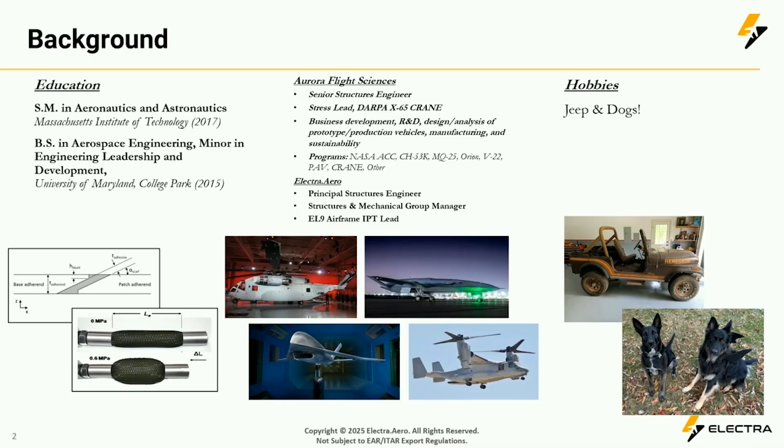Certified for single pilot operations, but with 2 crew stations, carrying roughly 2,700 pounds of payload, a max range of roughly 1,100 nautical miles, a nominal takeoff and landing roll of 150 feet, a max cruise speed of 175 knots, and being a hybrid electric aircraft operating in a mostly quiet environment, less than 75 decibels during takeoff.

So I really flew through the major headline there of why the EL-9 matters. What are we trying to do? This is an ultra short takeoff and landing aircraft. And what I mean by that is we are using blown lift to provide helicopter-like operational profiles. We've demonstrated that blown lift can increase our wing lift by 7-fold, allow takeoff speeds less than 35 knots, which allows us to have a ground roll less than 150 feet, or a total footprint of 300 feet.

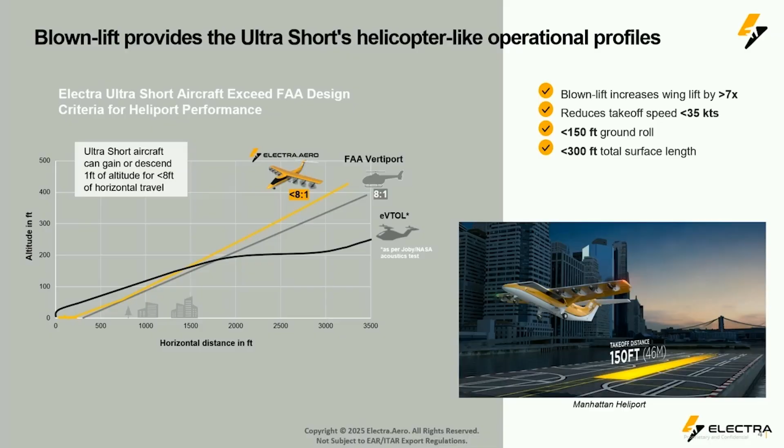So imagine a 9-passenger aircraft that can take off and land in an area the size of a soccer field today. Or what's shown there in that bottom right-hand picture, one of our desired missions that we're targeting is operating in and out of the Manhattan heliport.

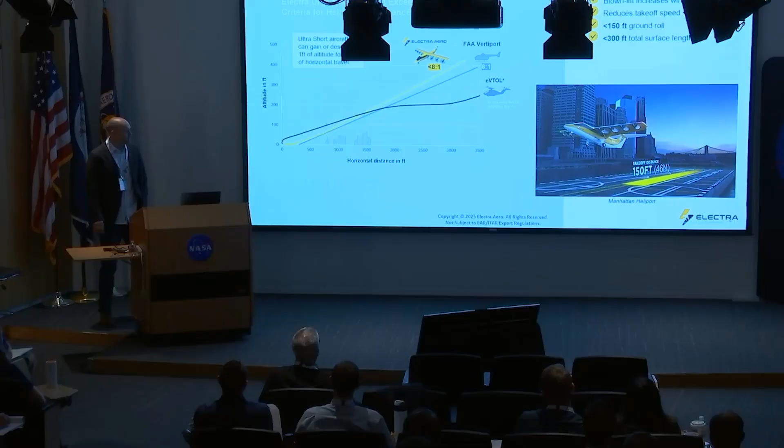So how do we do it? So blown lift isn't new. It's been around for decades. Aircraft currently flying today have this capability, and even some of the engineers in this room have probably researched it. I know at NASA Langley they have researched the opportunities and benefits of blown lift.

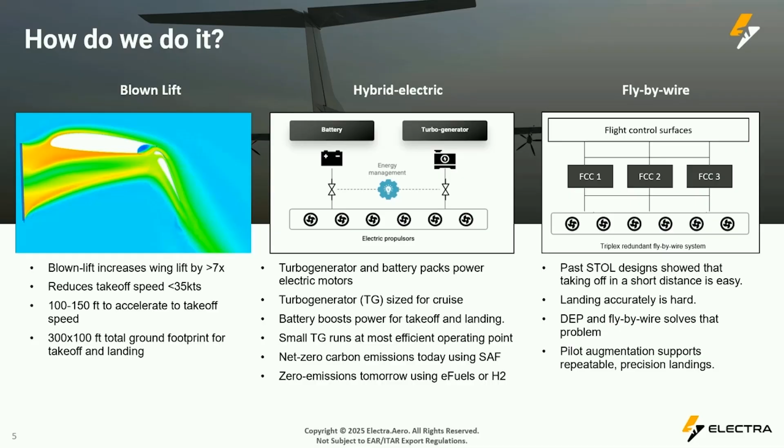What we're doing at Electra is really integrating three core technologies that provide unparalleled performance. The blown lift technology that I've already touched on provides that 7x wing lift at very, very low takeoff speeds, less than 35 knots, and enables us to take off in less than 150 feet and operate in a 300 by 100 foot ground footprint.

And how do we do that? This is a hybrid electric aircraft. There's a turbo generator and battery packs that provide power to the electric motors. This hybrid architecture allows the turbo generator to be sized for cruise, and the batteries are really there to provide that power boost for that short takeoff and landing.

Now, past STOL designs have really showed that takeoff in a short distance is relatively easy. Where it gets complicated, especially on the pilot, is landing accurately, over and over again, safely, repeatably. And in these tight environments that we're targeting, like that Manhattan heliport, you can see where it would be very critical to not miss your mark. And so that's where the EL9 is also going to incorporate a fly-by-wire system to really augment that pilot capability and enable all of this to work together and certify as a Part 23 aircraft and demonstrate this capability.

Now, at Electra, we face a lot of the same problems that every new aircraft development faces. We don't have enough people. We have to move really quickly, and systems is constantly putting holes through our primary structure. So like I've already mentioned, we are a startup. We have a really small team of extremely talented engineers. We're roughly 80 employees total across Electra.

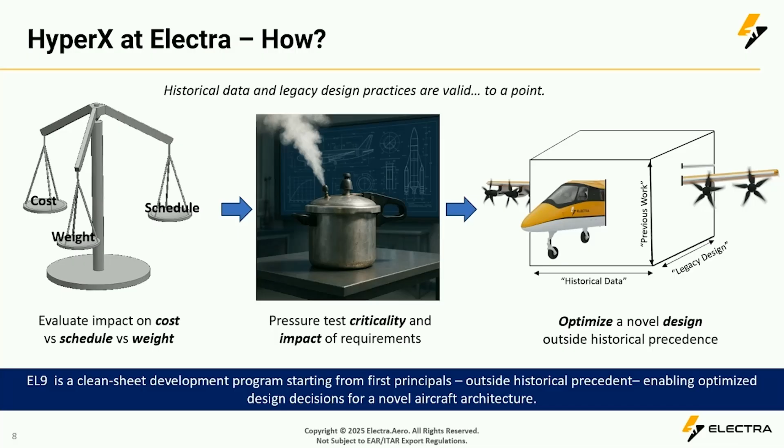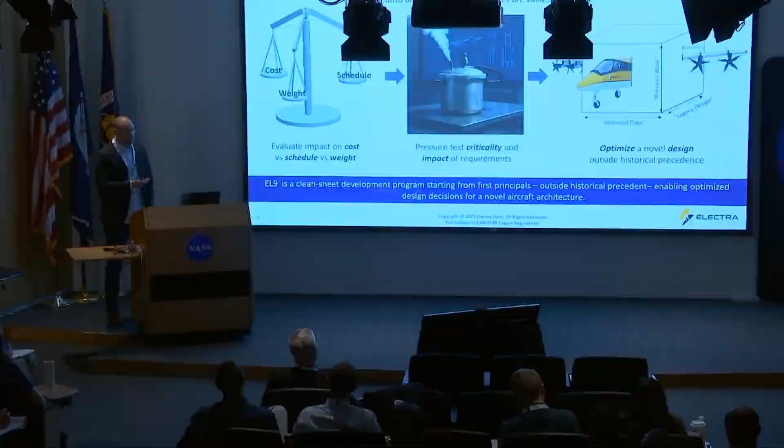So how do we do that? Well, we started by evaluating a lot of our design assumptions, requirements, and what we felt were the best practices against cost, weight, and schedule. And this allowed us to really pressure test the criticality and impact of those different assumptions. What was actually driving weight? What requirements could we change or give up to allow us to meet our weight targets, or what was actually important to the program? And this really drove us to optimize our design beyond just early parametrics and really started to redefine the box for the EL9 airframe.

So going on in a little more detail, how do we do all of those steps previously? We've run a lot of trade studies on this aircraft, and I say we, Electra's partnered with Collier and JD and his team to do a lot of this analysis and feed the Electra team as we're progressing along. So we're using HyperX to evaluate the structural layout, assess the design and analysis requirements to rapidly mature beyond that parametric and really feed the design guides and the analysis plans.

So, we don't have the super long detailed design guide from a past program where you would just copy and paste and start tweaking that to your program's needs. A lot of these documents we're starting from scratch, from day one, with first principles, and then going through and running these trade studies to say, okay, we can do better. This is what the team needs to do, and how we're going to standardize the design to meet our cost, schedule, or really manufacturability requirements.

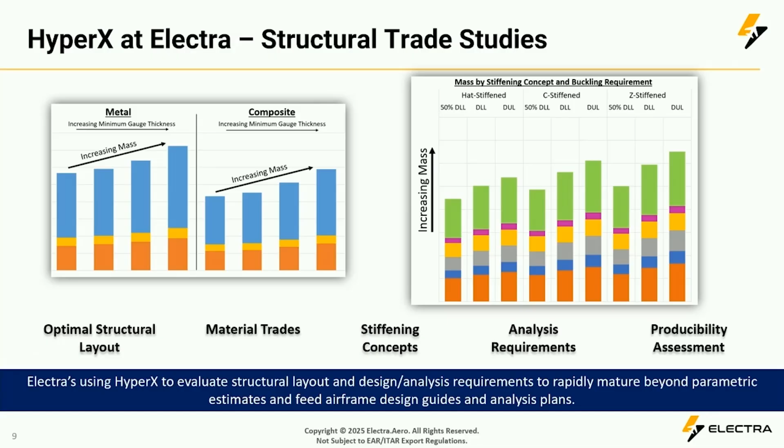So we looked at a lot of different trades. You can see a number of them here, whether it's material trades, all around the aircraft evaluating metal versus composite for different parts, various stiffening concepts, trading for weight, the hat versus C versus Z stiffened composites, as well as analysis requirements. So you can see, we also looked at how changing minimum gauge for metallic as well as composite and the impact on damage and durability tolerance impact the aircraft cost and weight, as well as the buckling you can see on the right.

And we looked at a large range of buckling criteria to see what was driving weight around the aircraft and what assumptions we could tweak between the wing and fuselage and empennage and what were the right levels of conservatism to feed into the design at this stage so that we could be confident that we were designing an airframe that would in the end meet our objective.

And lastly, producibility assessment. So throughout all of this, and I'll touch a little bit more on the next slide, we were constantly talking to manufacturing engineering to say, hey, can we make this? Can we do better? Sorry, August and Craig, I don't have any good pictures in this presentation of how the team took advantage of HyperXpert as well as the CAD generation tools, where we're feeding out that data and passing that along to the rest of the program team to say, can we manufacture this part? Can we manufacture it at the rate that we're looking for and at the cost that we're looking for? Once we get that thumbs up, that now feeds back into the design guide, into our best practices going forward as a company and as a team as we're maturing the EL9.

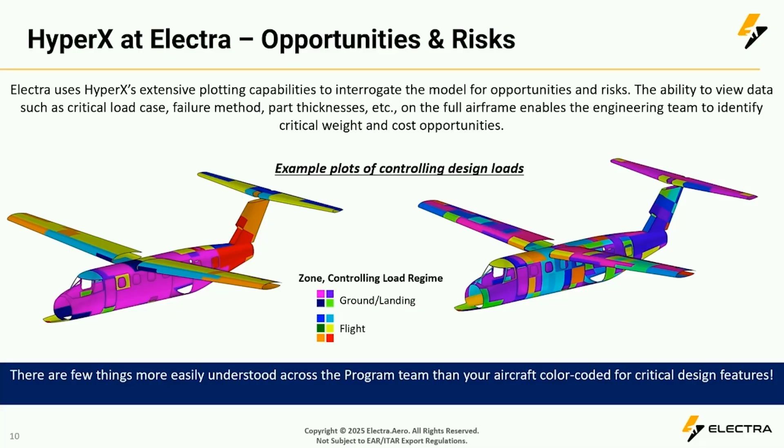Something that's unique, at least for me, working on a brand new aircraft like this, where the customer is less defined, is we are defining the requirements and what is best suited to meet the mission that we're targeting for this aircraft. Now, of course, being a Part 23 aircraft, there are ASTM requirements of what loads we need to consider, but there are also requirements that we set that we want this aircraft to do. And so these kinds of plots are critical for us to sit down and say, what are the driving load cases? What's increasing weight around the aircraft? Is that an appropriate load case? Is it certification driven, or is this Electra imposing a very strict requirement that we're trying to meet, where maybe we can loosen up that grip a little bit?

And so these kind of plots have been really helpful as a team to shape the mission and objective of the EL9 aircraft. And again, then we can go back to the loads group, or flight controls, and say, hey, we need to make a change because this is driving weight, and I think we were being over conservative. Can we tune the flight control laws, or can we tune the takeoff and landing performance so that we can pull weight out of the airframe?

And so Electra is heavily using all of the plotting capabilities to really interrogate these models and reduce the overall weight of the airframe. And not just weight, I mentioned there cost as well. So like any certified aircraft, we are heavily focused on weight and cost and schedule of hitting that 2029 entry into service date.

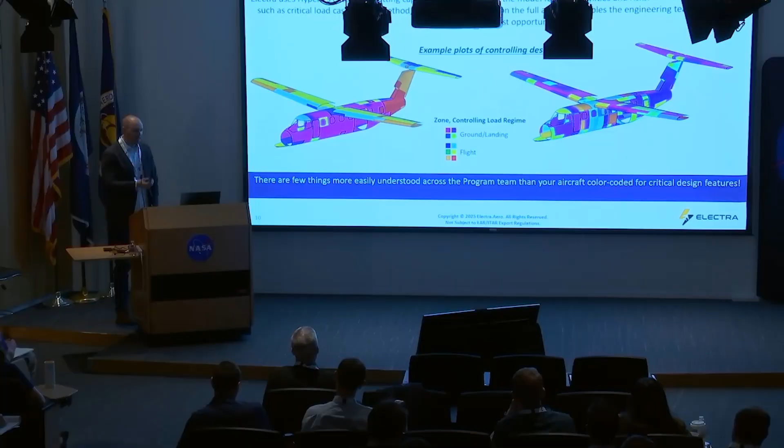So, I touched on it very quickly, but getting the manufacturing engineers in here as well and plotting not just loads, but from the HyperX plotting, looking at the stiffener spacing or stiffener heights or cross-section shape and all of that. And all of that feeds into our metrics that we're using to evaluate weight and cost and in the end justify how we're going to move forward maturing the design of this airframe.

So I do want to cover some of the high-level challenges and maybe some recommended solutions for interfacing with HyperX. I know everyone here is pretty much a user, and none of this should be a surprise. But as with any tool, users must recognize the challenges and master those design principles to avoid that classic garbage in, garbage out. When you're a really small team working on this, it's really easy to fall into this trough.

New programs, we typically allocate time in the schedule to set up those analysis tools so they fit the aircraft. Every aircraft presents unique challenges that the airframe stress and design engineer has to overcome, whether it's in our case, systems integration throughout the airframe, leading to very large penetrations, or high temperature requirements. Every aircraft's unique. And so usually in larger companies, you might start with an Excel template or Excel tool, copy and paste it for your program and start editing those tools.

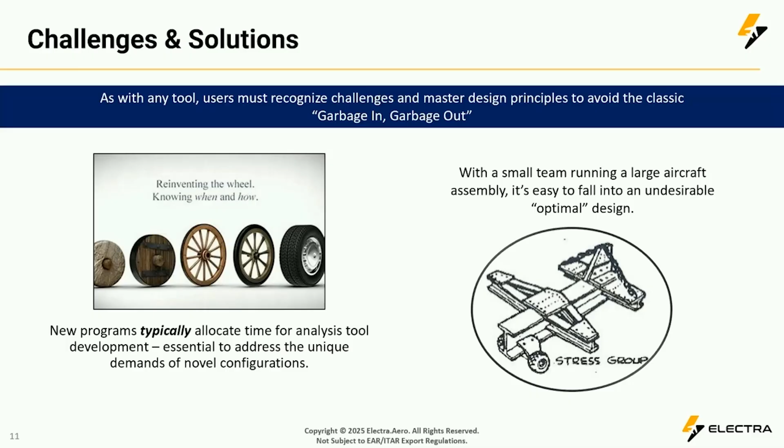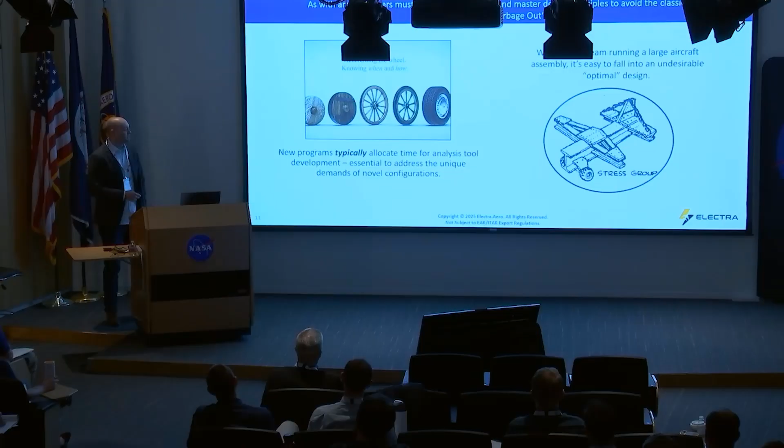Very quickly, once you really start digging into the weeds, you realize your design was what's shown here in the picture. It might show all positive margins of safety, but you go and show this to a designer or a manufacturer, and they might kick you out of the room. So it's really easy to fall into these kind of holes, and you have to be aware of that with any kind of tool, but particularly I think HyperX brings its own challenges.

So how do you avoid these two pitfalls that I touched on in the previous slide? Like a lot of the folks here have touched on today, you plan around incorporating and optimizing for HyperX from the beginning. That way you can fully leverage its structural analysis capabilities. So it's not just optimizing your airframe with HyperX, but you really need to set up your whole thought process from the get-go that you're going to use this tool.

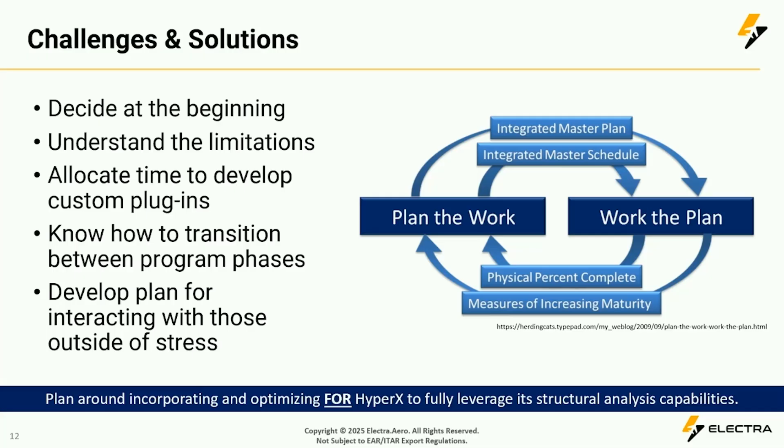And that means decide at the beginning, plan out how you're going to build your GFEM, how are you going to work with the loads group, understand the limitations of HyperX, of the standard methods within the tool suite, what plugins do you need to go and develop, or just what are the limiting capabilities that you might need to then go and allocate time to develop plugins.

And then also have a transition plan between phases. I know the Collier guys are preaching of using it from the beginning all the way to the end, and we just had a great presentation talking through taking it all the way to certification. But sometimes a program might decide that that's not the case, and so you need to know how you're going to transition between program phases, and it could even be continuing to use HyperX, so like from PDR to CDR, how are you going to transition your database to go to that next stage? Or are you going to transition out of the tool suite, and how are you going to do it?

And lastly, developing a plan for interacting outside of stress. So how are you going to communicate with the loads group, with the designers, with the manufacturing engineer? We've all touched on, there's a lot of data that HyperX provides to us as stress analysts. The hard part is figuring out how are you going to plot it or present it to the rest of the team so that it's meaningful. It's very easy to fall into, here's 100 slides with 100 screen grabs and give it to the rest of the team, and they're overwhelmed and can't digest it.

I think the Collier team's doing a great job of creating tools like the HyperExpert, like the CAD generator that is meant to, I think, improve that communication across the teams. But I think this is, from the beginning to avoid some of those pitfalls I touched on the previous slide. It's really, highlighting on the right, plan the work and work the plan. So know from the beginning that you're going to use HyperX.

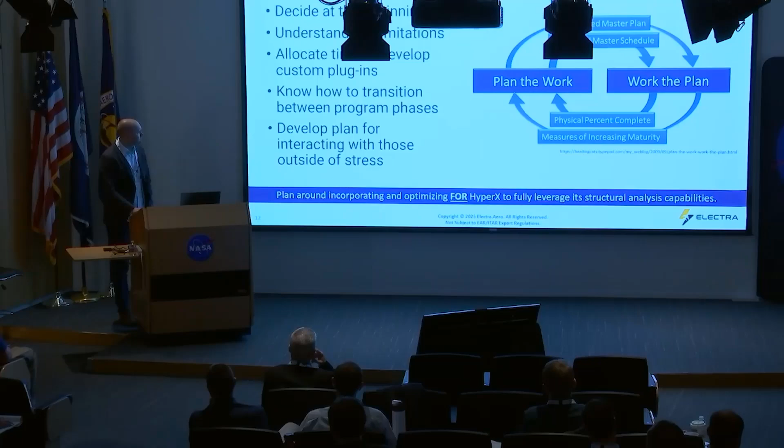Great presentation and great Spider-Man quote. If you go back 2 slides, a quick question. You kind of touched on this with HyperExpert and the CAD import and export, but you said that you plan and optimize around HyperX, and that you develop a plan for interacting with those outside of stress, which is often very important, and we miss it sometimes. I was curious if there's any specific additional features that you felt beneficial from HyperX for interacting with those outside of stress, or dare I ask, any features that you wish were in it to help with that capability?

Good question. I think I showed a good picture of the loads plot. That's been super helpful interfacing with groups like the loads group, because they care a lot about that. Showing that kind of picture to a chief engineer or a flight physics person, I mean, the amount of value I've gotten was, wow, this is great. Now we know how to turn the wheel. I would say the hardest folks to interface with sometimes are the manufacturing engineers, right? And trying to relay, which I know the CAD generation tool is trying to improve the communication with designers. I think it's how can we add on to that to better communicate with the manufacturers.

I think the EL9 aircraft is a primarily metallic structure. HyperX has a lot of composite capabilities, a lot of visualization for developing that soft tooling and going to the layup techs or the manufacturing guys and showing this is how I'm going to drop plies. On the metallic side, it's how can we do something similar to present the metallic metadata so that, hey, can we physically manufacture this metallic part? Thank you.